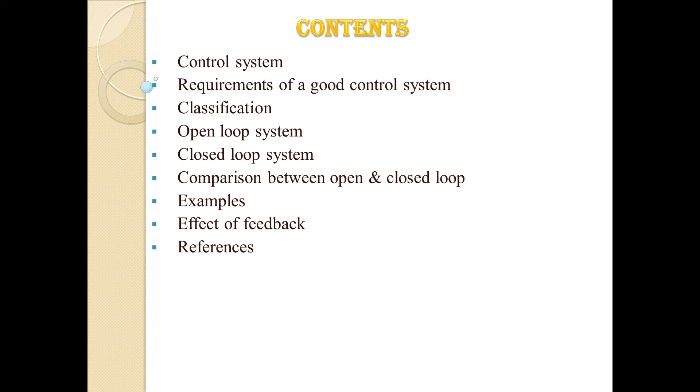So, what is a control system? When a number of elements are combined together to form a system that can manage, command, direct or regulate the behavior of other devices or systems to produce the desired output, then it is called the control system. As the system controls the output, it is known as the control system.

Each element connected to the system has its own effect on the output. A control system is a system which provides the desired response by controlling the output.

Now, human civilization is being modernized day by day. The demand of automation is increasing accordingly. So automation highly requires the control of devices, and in recent years control systems have played a central role in the development and advancement of modern technology and civilization.

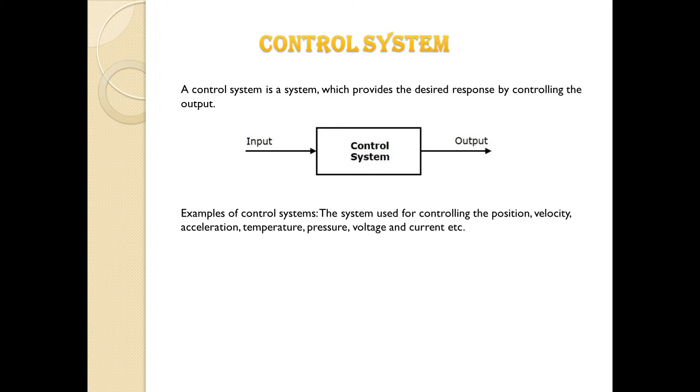These systems are also used in industrial processes for more output, and we find control systems in quality control of products, weapon systems, transportation systems, power systems, space technology, robotics and many more. So, systems used for controlling position, velocity, acceleration, temperature, pressure, voltage, current, can all be considered examples of a control system.

Next, the requirements of a good control system. To be a good control system, the first requirement is accuracy. Accuracy is the measurement of tolerance of the instrument and defines the limits of the errors made when the instrument is used in normal operating conditions.

The accuracy can be improved by using feedback elements. To increase the accuracy of any control system, an error detector should be present in the control system.

The next requirement is sensitivity. The parameters of control systems are always changing with changes in surrounding conditions, internal disturbances or other parameters. This change can be expressed in terms of sensitivity.

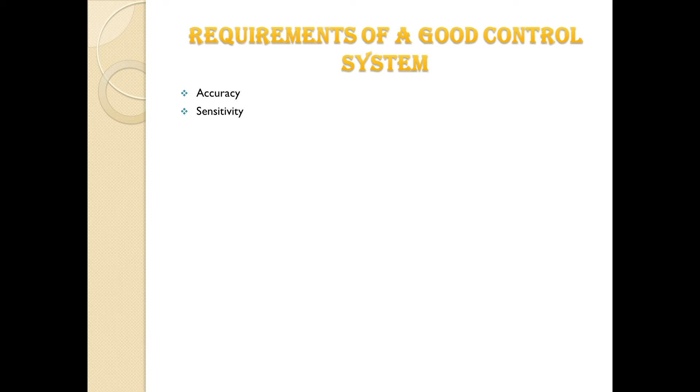So, to be a good control system, it should be insensitive to such parameter variations, but it should be sensitive to the input signals only.

The next one is noise reduction. An undesired input signal in the system is known as noise. A good control system should be able to reduce this noise effect for better performance.

The next is stability, which is a very important characteristic of the control system. For bounded input signals, the output must be bounded, and if the input is 0, then the output must be 0. Such a control system is said to be a stable system.

And next is bandwidth. The operating frequency range decides the bandwidth of a control system, and bandwidth should be as large as possible for the frequency response of a good control system.

The next one is speed, which is most important, and it is the time taken by the control system to achieve its stable output. A good control system possesses very high speed, meaning that the transient period for the system is very small.

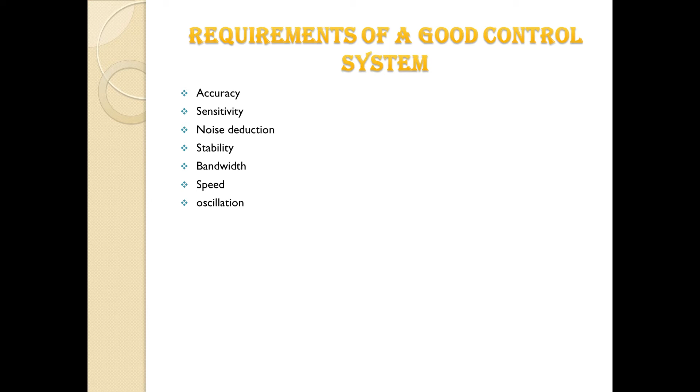And last is oscillation. A small number of oscillations or constant oscillation of output tend to indicate the system to be stable. So, to be a good control system, these are the important requirements of a good control system.

Next is the classification. Now, depending upon the purpose of classification, any system can be classified as follows. First, as per the method of analysis and design, we can classify it as a linear system or non-linear system.

Linear systems are made of devices which obey the superposition principle, and they are governed by linear differential equations. Whereas nonlinear systems cover a wider class of systems but do not obey the superposition principle.

According to the relation of the parameter with time, we can classify a system as time variant or time invariant. If the input or output characteristics change with time, the system is called time variant; if they do not change, it is time invariant. For example, the mass of an aircraft changes as fuel is consumed, so it is a time variant system.

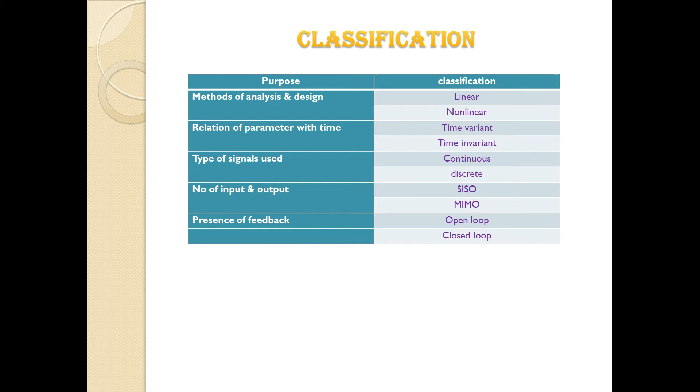Last but not least, as per the presence of feedback, a system can be classified as an open loop system or a closed loop system. In an open loop system, the output is free from the input, while in a closed loop system, the desired output depends on the input. The open loop system is called a non-feedback system since no feedback is connected, whereas the closed loop system is known as the feedback system. Let us discuss more on the open loop and closed loop systems.

Some features of the open loop control system: it is simple in construction and design, economical and easy to maintain, generally stable, and convenient to use. However, the output is difficult to measure. The main disadvantage is that there is no feedback path present, so the control action is independent of the desired output, making it inaccurate. They are also unreliable, and any change in the output cannot be corrected automatically in an open loop control system.

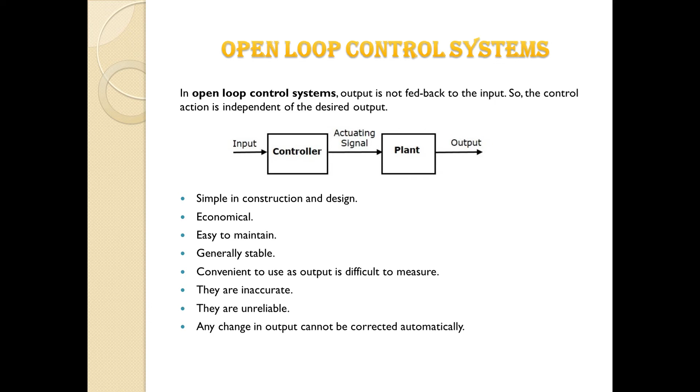To overcome these disadvantages, the closed loop control system has been considered. In a closed loop control system, the output is fed back to the input, so the control action is dependent on the desired output.

As per this error signal, the controller takes the control action and creates the manipulated variable, or actuating signal, which goes to the process, and as per the signal, the process creates the output.

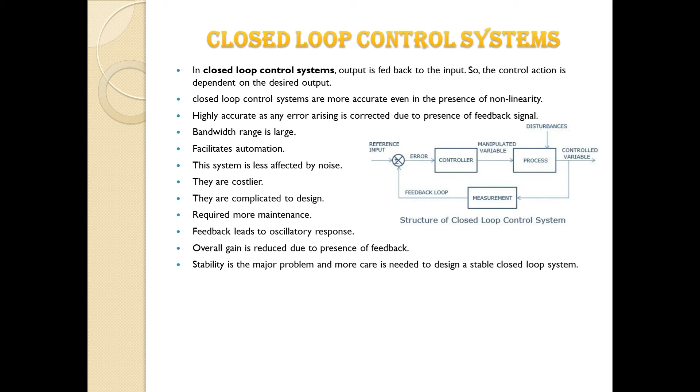So let's take some practical examples of open loop systems and closed loop systems. If we consider the open loop system first, we can take the automatic washing machine, which runs according to the preset time irrespective of whether washing is completed or not. Another example is the electric hand dryer, where the hot air comes out as long as we keep our hand under the machine, irrespective of how much our hand is dried. Or the bread toaster, which runs as per the adjusted time irrespective of whether the toasting is completed or not.

Another example of an open loop control system is the automatic tea or coffee maker. These machines actually function for a pre-adjusted time only. The same is applicable to the timer based clothes dryer, where the machine dries the wet clothes for a pre-adjusted time no matter how much the clothes are dried. And the light switch: the lamp glows whenever the light switch is on, irrespective of whether the light is required or not. So all these are examples of open loop systems.

And next is the closed loop system. For the closed loop system, we can consider the servo voltage stabilizer, where the voltage controller operates depending upon the output voltage of the system.

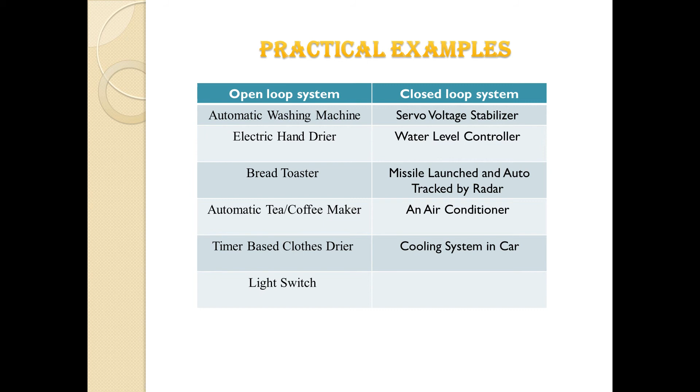So next we discuss the comparison between the open loop and closed loop system. In the case of an open loop system there is no feedback, and in the case of a closed loop system feedback is always present. In an open loop system the input is directly fed to the controller, whereas in a closed loop control system, instead of the reference input, the difference between the reference input and the feedback signal is fed to the controller through the error detector. So in an open loop system the error detector is not present, whereas the error detector is always present in the closed loop control system.

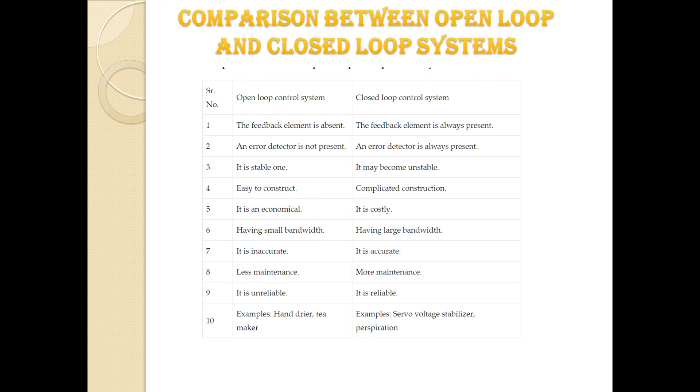The open loop control system is easy to construct and economical, whereas the closed loop control system is costly and complicated in construction. The open loop control system may be stable, but the closed loop control system may become unstable. In an open loop control system the bandwidth is always less, and the closed loop has a large bandwidth. The open loop is inaccurate, and the maintenance cost is less, but it is also unreliable. Whereas the closed loop control system requires more maintenance, and it is accurate as well as reliable. And we have already discussed the different examples of open loop and closed loop controls.

So let's take the example of effects of feedback. What will happen if we use feedback in a system? This is the block diagram of a feedback control system, that means a closed loop control system. R is the reference input and E is the error signal. E is the algebraic sum or difference between the reference input signal and the feedback signal, and B is the feedback signal. G is the forward path gain, C is the output signal, and H is the feedback.

So the error between the system input and system output is gradually reduced, because every time we are taking the output as feedback, and as per this feedback the error is produced. The error is the difference between the reference input and the feedback signal, and as per this error signal it takes the controller action, and after this action it will be rectified, and then the feedback is either decreased or increased, so the error decreases gradually.

Now the system gain is also reduced, and the sensitivity of the system has been increased, but the stability may be affected due to the use of feedback. In a closed loop system the overall gain is reduced, but stability is the major problem, and more care is needed to design a stable closed loop system. But the speed of response is increased. Speed of response means the time it takes to reach the stable state. So these are the effects of feedback, and overall the closed loop system has more advantages than the open loop system.

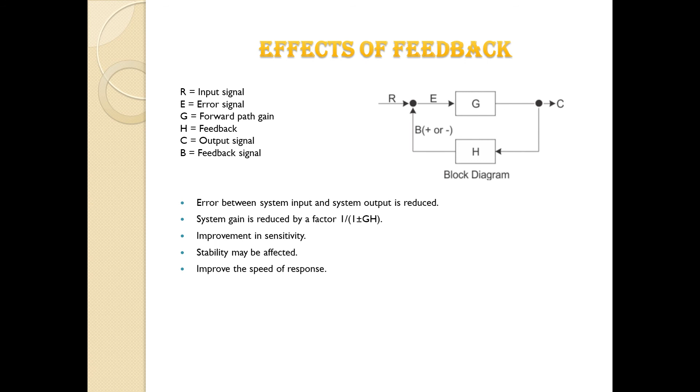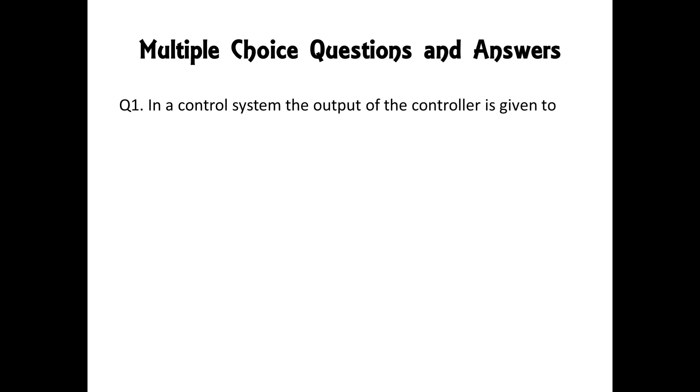Now we will go through a question and answer session in the context of this video lecture. You are requested to go through gradually and try to solve the MCQ questions on your own. Answers are